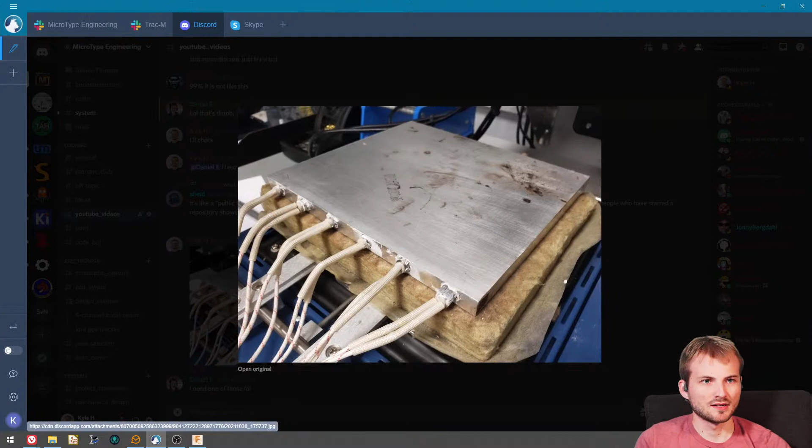But anywho, all right, so for this stream, I just posted this in Discord. So you're not showing your person anyway. I know, it's kind of funny, it's only at the start, but whatever. So this is the hot plate that I currently use for pretty much all of our prototypes.

It's like the greatest thing ever. And it's simply just an aluminum extrusion that has 2, 4, 6 high power cartridge heaters that go into the aluminum plate. And these, I have tried everything in my power to find where I bought them from—it was like 3 years ago—to get the exact specs on it, but I can't find it. I'm pretty sure they're like 2 amps, 2.5 amps each at 115 volts AC. Obviously I can measure it, but they're all connected in parallel, so I'd have to disconnect that.

But basically, yeah, just super high power cartridge heaters here. And right now this all just goes to a single plug that I plug into an outlet. And then there is obviously the mineral wool that keeps it from burning up whatever's below it, which obviously mineral wool isn't the greatest thing to be breathing in. So it's kind of really janky right now. And I don't have a way to control the temperature.

So basically it's on a switched outlet. Depending on what type of solder I'm using, I will typically put the board on and then turn it on at the switched outlet. And then once it's going, it will take like 3 or 4 minutes to reflow. Or if it's higher temp solder or a denser board, I'll sometimes start it heating, then put the PCB on it, but it just depends.

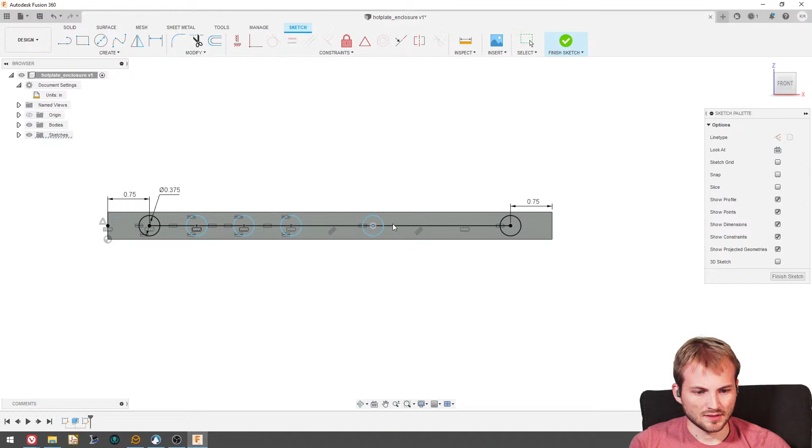Okay, so I need to make all of these equal. Oh boy, now I've done it. Okay, I believe that's good, and now it should just be needing to constrain these. Yes, okay.

Came running back to mechanical design. I know, right? And by watching me clumsily go through this, you wouldn't really even expect that, but it is what it is. Okay, there you go.

So let me see what this actually is. How accurate? 1.3. Okay, so my measurements were pretty solid.

Yeah, through school I got certified in SolidWorks, and that's what I had been using. But once I was out of school, I could no longer get education pricing and would rather not use that for work. So Fusion it is, which honestly, for a lot of things, it's honestly better that way.

Okay, so basically, here is our hot plate, and let me make this its own component, and then we'll rename it hot plate.

And for now, Fusion is hands down my favorite, but have you used SolidWorks? Until you've used that, I mean, that's one of the gold standards, at least for non-simulation heavy work. It's a pretty good standard, but okay, so I grounded this.

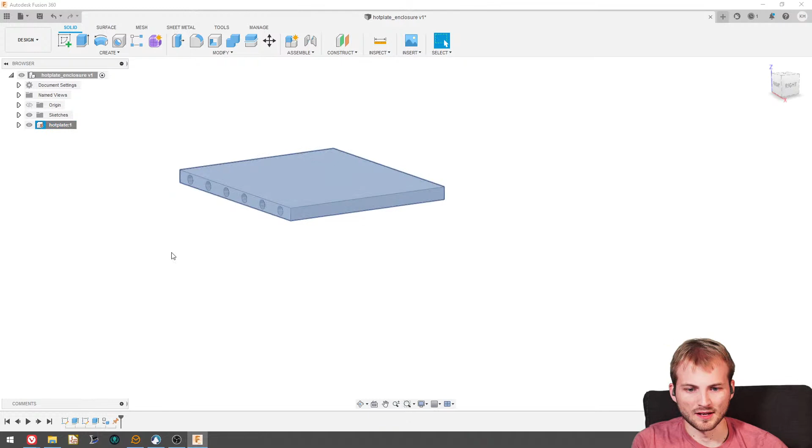So the plan is kind of twofold. One is we need to get it off of that mineral wool, so we need a way to elevate it. And to Sion's point, I don't think we're ever going to be able to cool this down fast enough to where you can keep the board on it. While that would be really nice, I don't think it's possible. It would be really nice to use a fan and cool this off faster. But also, there's a lot of thermal mass still in here, which makes it heat up slower.

So one thing I'm planning on doing, and this isn't going to be a focus of this stream, but I think I'm going to get sections like this milled off here to make it much, much less thermally massive. So it'll heat up a lot faster, and then it'll also cool down faster, especially with a fan. So that's something in the future.

I've tried using it, but the learning curve was a bit rough. Oh, for sure, the learning curve is there, but it was honestly painful going to Fusion because SolidWorks is so part based, where you make all your parts separate and then add them into an assembly. Here you do it together, which I think is much faster for stuff like this that's super simple. But for bigger assemblies, this becomes a nightmare, which is why SolidWorks is still used a lot more in industry.

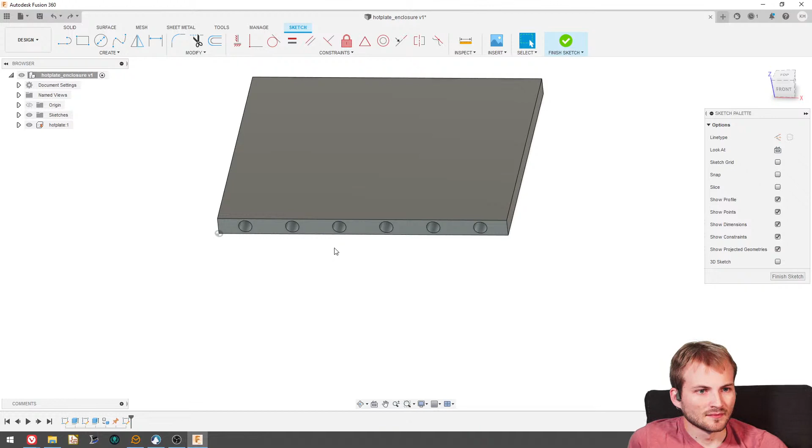But yeah, either or. Electrically triggered liquid nitrogen injection? Oh trust me, I've thought of water. I've thought of attaching some water cooled brackets here or a manifold so you could cool it with a computer water cooling system. But other than having to worry about the water boiling off, any metal added in here is going to make it more thermally massive. So we could do holes in here and pump fluid in, but I don't think we're still going to be able to cool it down quick enough. And it's so inefficient having to heat it up fully each time for every board. So I don't think that's going to work.

Why not just control it with an SSR like a heated print bed? Bruce, you're jumping the gun, I'm not there yet. Could it do PID? Yes.

So to summarize, two things I want to accomplish. One is build a stand for this so it's no longer sitting on mineral wool. And the second is to design the electronics for this so we can use whatever microcontroller. Once that's set up, it really isn't going to be able to follow a reflow profile because it's going to be full power until it gets to reflow temperature. But at least it might be able to hold it at that temperature. And then when I switch it off, potentially having fans at the bottom to help cool it off.

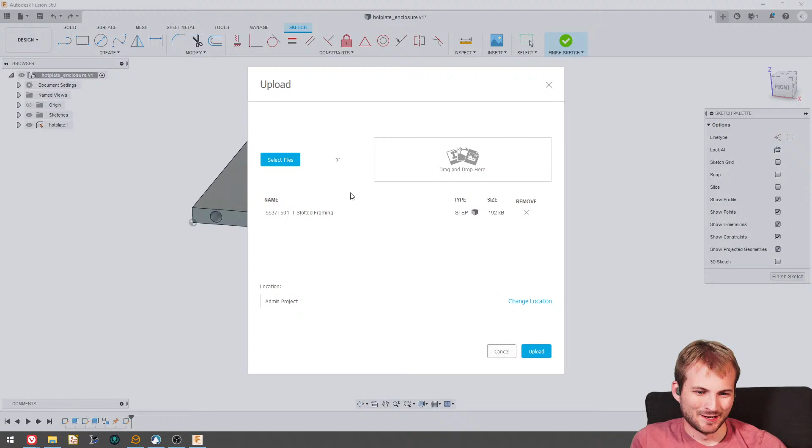So I am going to grab, I guess, just a foot step file. I have a decent idea of how this is going to work - I've been kind of thinking about this. I've wanted to do this now for probably 2 years, it just never happened. That's kind of why I decided to do a stream of this, because it kind of forces me to finally do it. But I still don't have all the electronics side fully sorted.

But yeah, hot plates for prototypes, I think, are by far the best way to do it, with the only exception being if you're doing any double-sided boards - obviously you can't really do it on a hot plate. But short of that, they work.

Come on, why is it not letting me drag it in? I don't know why it's not letting me. I don't understand, I can't show my side panel because I have other projects, but normally you can just drag in the other file - that's just a step. I have no idea what's going on. Let me see if it's because I have two windows open. One second.

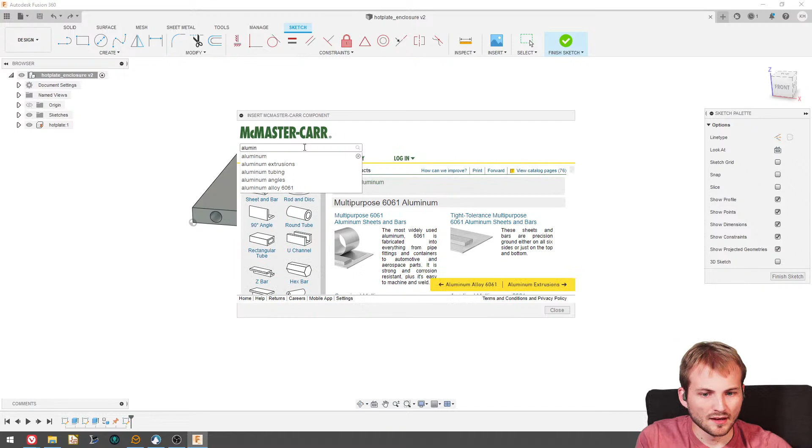Okay, I have no idea why - when I have it imported... oh, really? I can do them directly? That would be amazing, so how do you do it? You go through the insert menu. Where's the insert? Oh, right here. Are you serious? Okay, well that's really cool, I never knew that was a thing. Well, I appreciate it. Or anything SMD with through-hole pins, like some USB parts.

That is so cool that you can do this directly - that was something you could do with SolidWorks, I didn't know you could do it here. That's really cool. Okay, no, not 10 millimeter - 20 millimeters, the smallest standard size still. So 1 foot - so I'm assuming I still do 3D step, I guess? Oh, that is so cool, I appreciate that, that's really helpful.

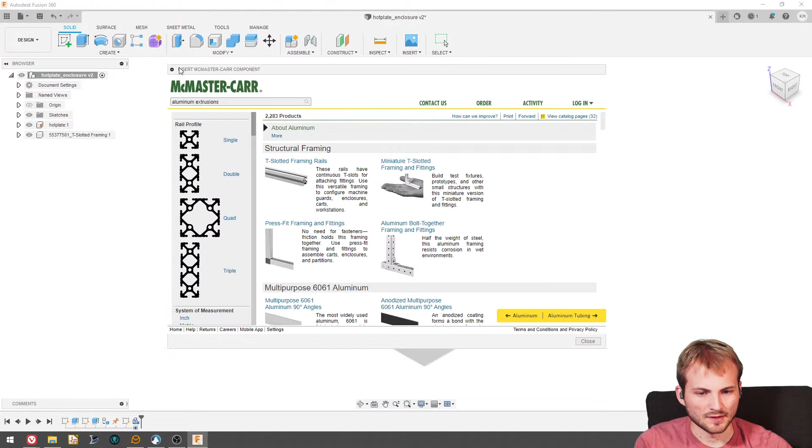Except... all right sweet, okay cool. So what I am thinking of doing, I guess I'll show you what I'm also going to be doing. Oh, that's I guess one annoying thing - you have to go back and find it each time, whereas if you're downloading them separately you get to keep it open on your monitor. But I guess beggars can't be choosers.

Okay, so basically using these brackets - I'll obviously properly mate these later, but just showing you the gist of it - these are going to hold up this hot plate. These are threaded, which is kind of annoying, so I'll just end up drilling these out, because if you tap both sides it's going to pull itself apart. So I'll drill these out and then tap a hole in the extrusion - this will be held up by the screws here.

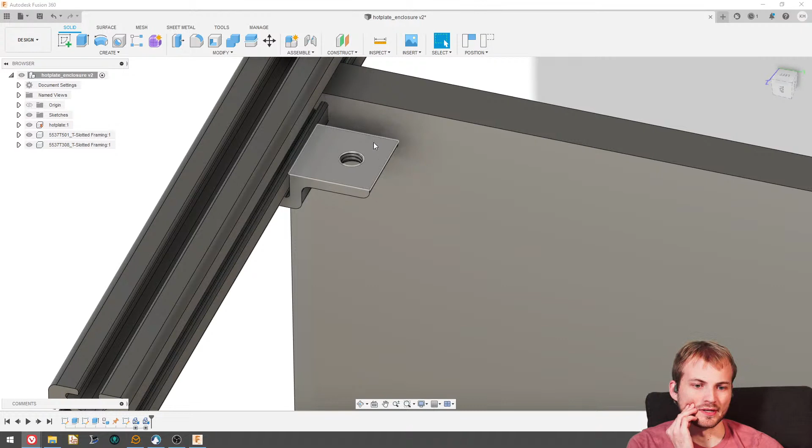And I'm debating what to do with the washers, because since this will be tapped it'll already have a thermal connection to it, which I don't want. But I guess if I don't really have a choice and it has to be thermally connected somehow, I could still put a ceramic washer, which will help insulate it, because I don't want a lot of heat getting from the hot plate to here - it would make it take longer to heat up.

But yeah, that's essentially the plan for making the corners of this - that part I haven't thought of yet. Nylon washers, yeah, you can't use nylon - nylon will melt, but you can use ceramic, which are thermally isolated.

The problem is the screw is going to be tapped on the aluminum, so there's always going to be a thermal connection at some point, and PEEK won't be nearly hot enough or won't withstand heat, so I'll have to use some sort of metal. You can mix metal, stainless. Yeah, that'll help some. Either way, it's going to transfer some heat, but I'm not too bothered. I'm only going to have to use 3 screws, so it really shouldn't be a big deal either way.

So for the brackets, for the corners, there's usually 2 different options. Normally these work pretty well. I think they have a three corner one. I guess it's just 4. Oh yeah, this is 3. So yeah, just using these in the 4 corners, that probably will work.

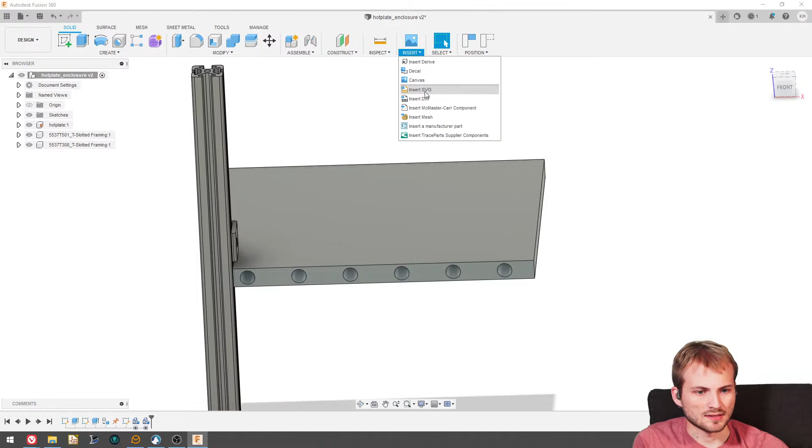Oh, and I bet I can do this. Just copy the part number, and now I can insert this much better, or quicker rather. Oh yeah, that's awesome. Man, that's like a game changer. That's such a big deal. That makes it so much nicer.

Okay, so the only other thing that's kind of a pain is on the end that the heater wire sticks out, it has a radius or distance of like 1.5 inches before it can start bending down. So we're going to have to extend the length on that side somehow, or to some extent. That's going to be a little bit annoying. I'm just trying to figure out now which way makes the most sense to start.

Probably with the extrusion, I think. Let's see.

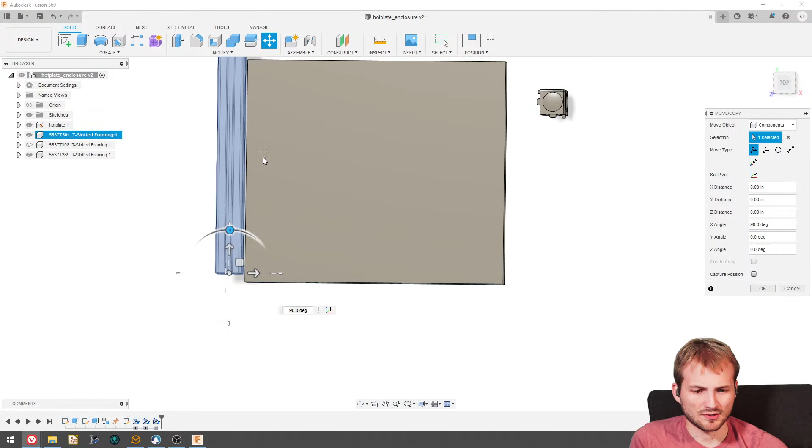Glass rods, used kind of like those wooden plugs IKEA's such a fan of. I like that, I like that. And what we can even do further to make sure - not that it's going to be jostled around, but to make sure the metal plate can't lift out of it - we could probably use some non-thermally conductive goop that's high temperature enough to withstand it. I really, really like that idea. Yeah, I think that probably is the game plan.

So basically what I'm thinking is, like I said, we're going to have this side sticking out by like 1.5 inches, and then the wires are going to come out and drape down, where all other 3 sides will be flush, or flush-ish. So I'm thinking just do it kind of arbitrary for now. And let's mate this at least on one side to know what the distance should be.

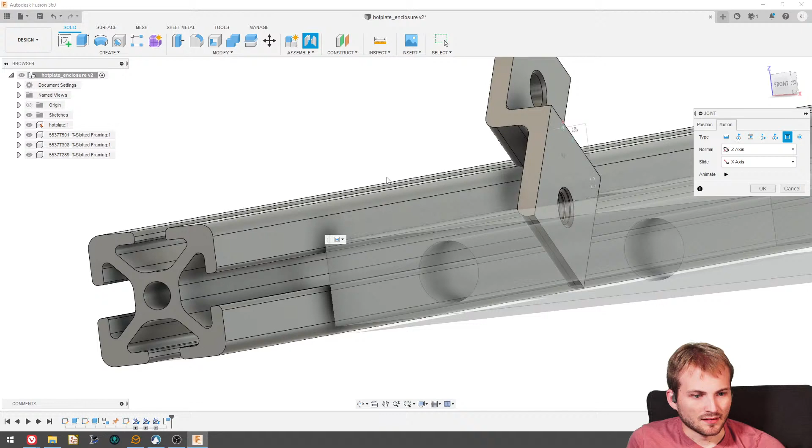You need a cheat sheet list for the partners. Yeah, right. It is funny all the random stuff that I learn from doing these live streams. It's insane, because it doesn't matter how much you know about a topic, you're always going to be able to learn things from people. That's one of the things about doing live streams and the Discord and everything that I was kind of surprised about, which is really cool. It's kind of like back in college - when you're around that many people at all times, you're destined to learn a lot of stuff just randomly.

Okay, so this isn't like the permanent orientation for the joint. I just want to see where it needs to align. Now doing...

SolidWorks calls it mates, here they call it joints. SolidWorks does a much, much better job. Some of the times it just doesn't count that it was clicked, and you have to redo it, or double click OK, even though you don't do anything different. Or you have to click flip twice, even though it's back to exactly how it was. That type of stuff's really annoying.

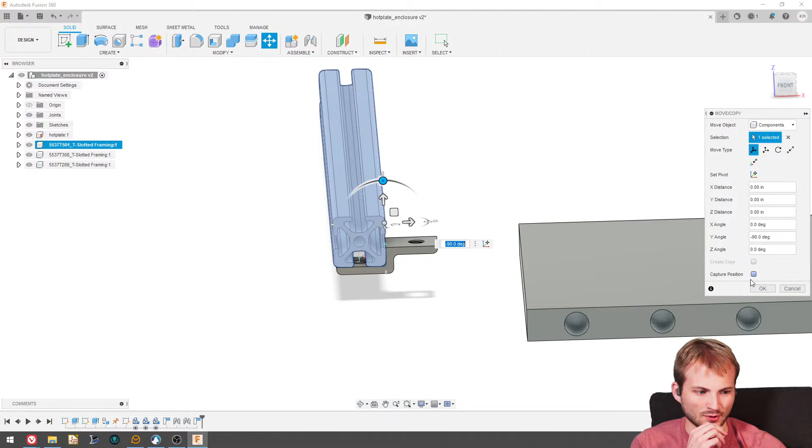So I guess just trying to think of which way makes sense here. Maybe what we'll do is actually rotate this and capture it here. Because I know it's under 15 amps, because this was before I actually moved to the office here, so it had to work at my home electric, and that was on a 15 amp breaker. So it needed to fit there.

Oh, I know what I'm going to do. Let's do the holes first, so then we can reference everything to that. Yeah, I like that. Sure.

Okay, so I believe these were a 1/4 inch, so let's just do a 1/4 inch hole here.

The way it forces you to do projections is also something that's really different with SolidWorks. I actually don't mind how it does it here. SolidWorks is kind of globally done, which gets you in trouble sometimes, but I just always forget and have to do it after the fact.

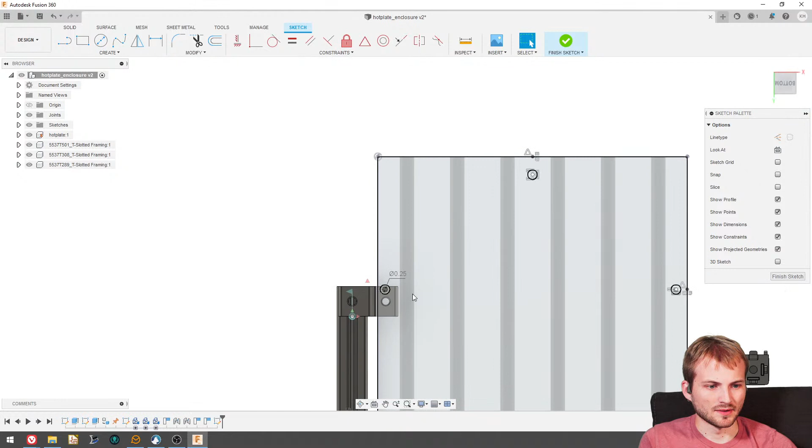Okay, so distance away, does that really matter? I don't really think so. As long as we're not too close to going into the actual area, I don't think it matters too much. So we'll base it off of these. Let's make all these equal.

Maybe 0.3 inches, we can do that for now. And I guess I'll just do these all the way through. Tapping a blind hole in aluminum, or really any metal, can be kind of annoying, so I might end up just drilling a through hole. We'll see.

Okay, so now that's what we can base all of the other joints to, which will make it a lot easier.

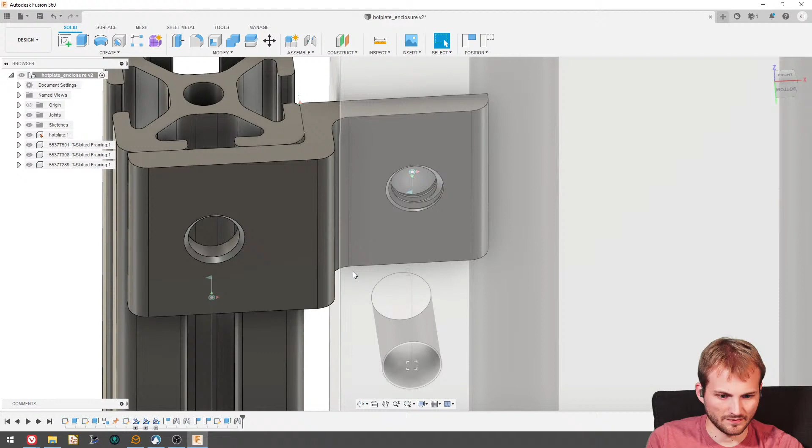And sometimes it lets you do a full mate, but that time it fixed it distance wise. That type of stuff I have not figured out fully with Fusion yet.

Which, I mean, I'm sure there's a way to accommodate that, but for some reason AliExpress decided I'm now expecting this in Hebrew. That's funny.

Just have to use some sort of... oh yeah, if I'm doing that, then they don't even have to be tapped, so that's another reason that makes it easier.

Yeah, this is the type of stuff that's annoying with Fusion, because it says there was already a concentric mate, but it let it move, which means there clearly wasn't a concentric mate.

And I'm not going for perfect accuracy here with this, because it's obviously going to be mainly cut by hand, so as long as the dimensions are roughly accurate, that's all I'm really going for.

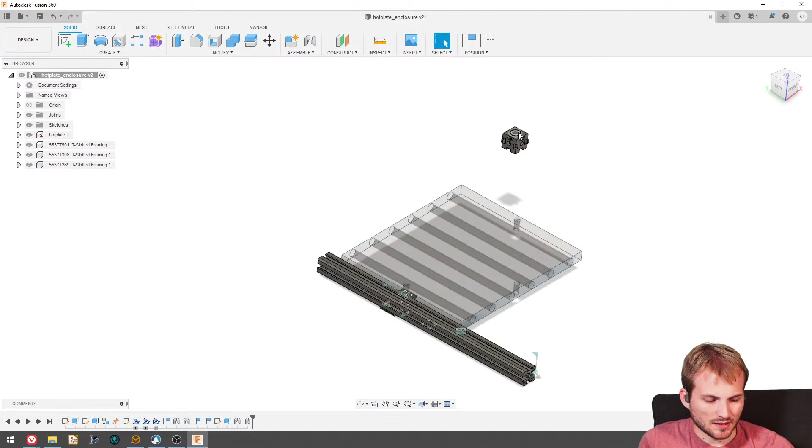Okay, so now which way do we want? I guess we can mate this now here and just build it out one side at a time.

So let's move this, and then it does weird stuff like that, like it thinks that I wanted to rotate it out this way for some weird reason. I'm just trying to get the orientation right, like that.

My 3D printer uses a ball mount, but that needed to mechanically separate and allow for thermal expansion. Yeah, the problem is this is going to be really hot, like 300 C, and not a lot of thermally isolated components will go that hot, which makes it a little bit rougher, but we'll see.

Again, I'm not overly concerned, but the more we can do, obviously the better.

So what I do a lot of times is I get the first mate like that, and then we'll just do an as-built joint, which clearly isn't the best way, but it works.

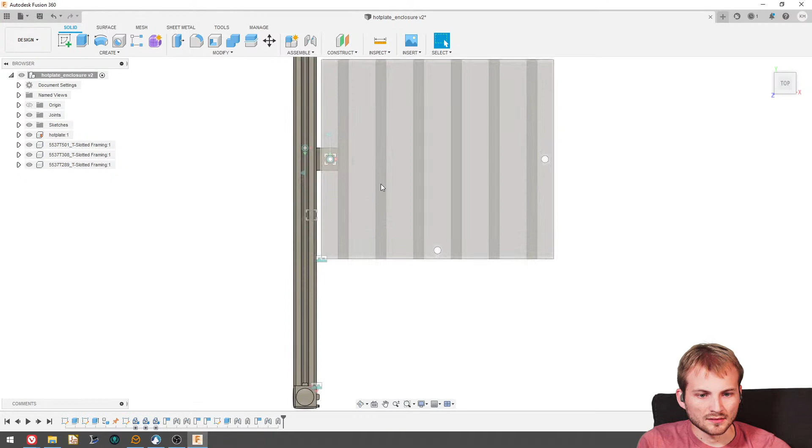Okay, so now let's copy this, and the one thing I really don't like is how if you paste it, it automatically links the two together, so you have to do paste new, or both of their cuts are tied together, which has screwed me over many, many times.

I understand that sometimes it decides French. Yeah, I've never had that happen before. I guess they value the whole American language. That was a joke if no one caught it.

Okay, mate these two, yes. Okay, now we need another one of these.

Now this one, since I'm not going to be cutting, I can just do paste, I don't have to do paste new, which, I mean, realistically doesn't matter.

So now I'm going to have to cut this, which... how am I going to figure out what's that neat feature where the part floats into place? This calls it a joint, but SolidWorks and most tools will call it mating.

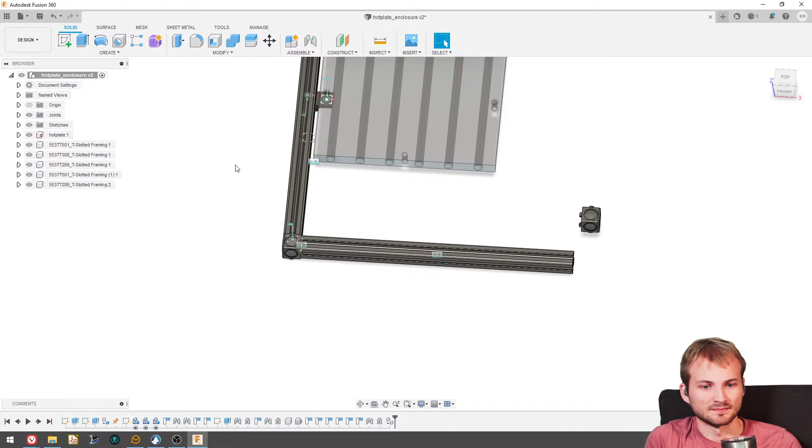Fusion, I really don't like the way they do it. It works good enough, but it's not very smart. Like SolidWorks lets you do two mates at once or even three, so you can fix it all at once, where here you have to do it separately.

So now how best do I cut down this? Oh, I guess I can do this first, so I don't have to worry about that right now. Whoops.

It calculates the way it should fit together. So basically you select the two features you want to mate, and you can select different motions like rigid, revolute, slider, cylindrical, pin slot, ball, and then it'll move it. In SolidWorks, you can completely constrain it in one go.

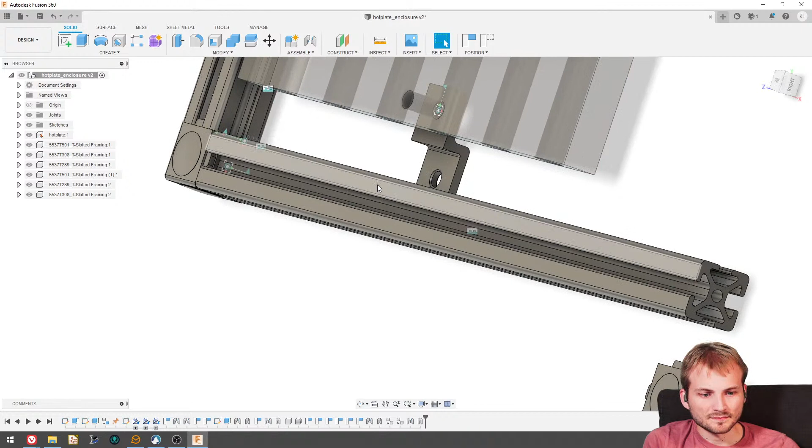Here, I don't know why, it's kind of not very intuitive. You do an as-built joint, which just fixes it right into place and overrides the previous one, which I guess isn't a big deal, but it's kind of annoying. So now here we'll do a planar joint on this side, so now this should be fully fixed on this side.

Okay, so now to cut this it'll be much easier. Let's put the sketch, and now we just need to get the distance here. Let's project here, and this edge, and that edge. And now if we do a line here, we can make it collinear.

It's not over-constrained there, pal. It's stuff like this that Fusion does. Okay, and then now with that distance, all we have to do is draw our squares or rectangles there.

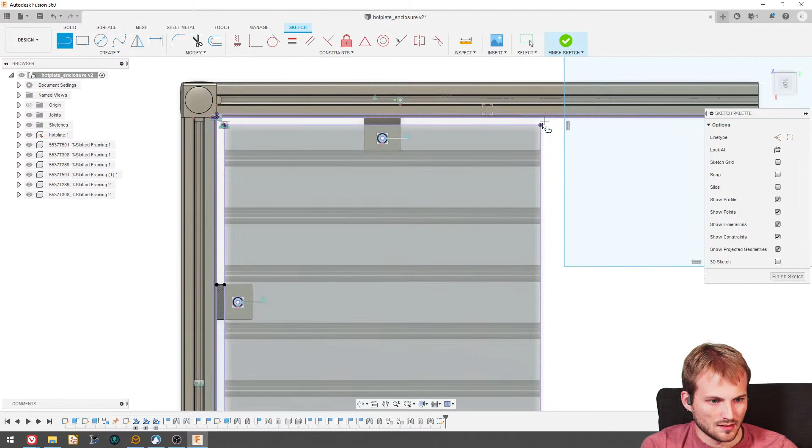And make a distance here and here. Oh, that is not perpendicular. Really? Oh, it's because it just so happens to be the midpoint, go figure. So now we'll make that equal, and that equal.

You really can't do it because I said extrude all. Really? So like there, it literally couldn't calculate the distance that it needed to extrude, which really shouldn't be a thing, but it's a whole heck of a lot cheaper than SolidWorks, so it's hard to complain too much.

Okay, now let's do one more. Now this one, let's take it from here, and that one, I guess. Oh, crap, this one is going to need to extend to give this room.

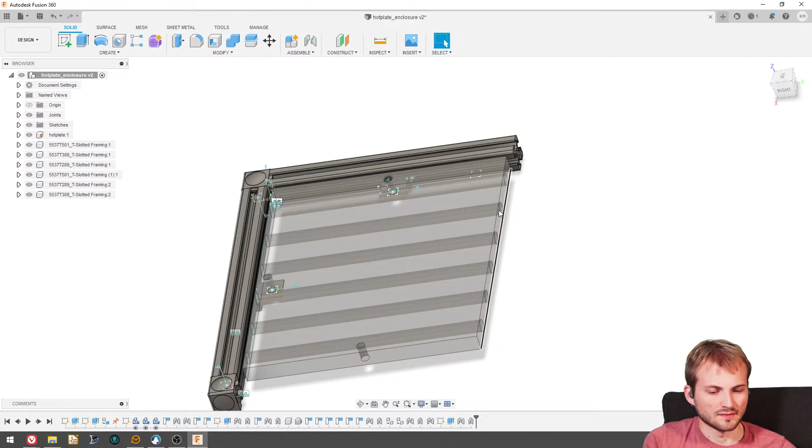So let's get rid of this, completely forgot about that. And now the extrusion's gonna complain. No? Okay, so now this one we will not paste new because we want those to be the same length.

It's funny, not many people must like me doing mechanical stuff, not a very popular stream. I honestly don't care too much because it's forcing me to actually do this project without just getting bored like I normally do or putting it off, so I do not mind.

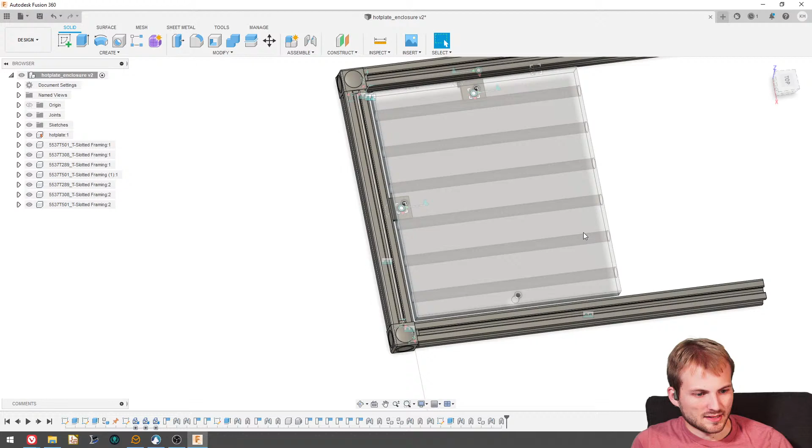Okay, so now it's just doing it for the other side that needs to extend down. So like I said, the wire sticks out here 1.5 inches, so maybe let's cut it like 2 inches and see how that goes. And in theory I only have to cut this side because the other one's referenced from it, so it's going to cut automatically. We'll see if that actually works though.

And apparently it's not going to be able to calculate. Yeah, so it automatically does that. Oh, I don't want to, I made that too big because we have to have this nugget, so let's see how long this is. 0.78, so let's do like 1.25 inches instead of 2 inches here.

Now copy, paste that again. Oh.

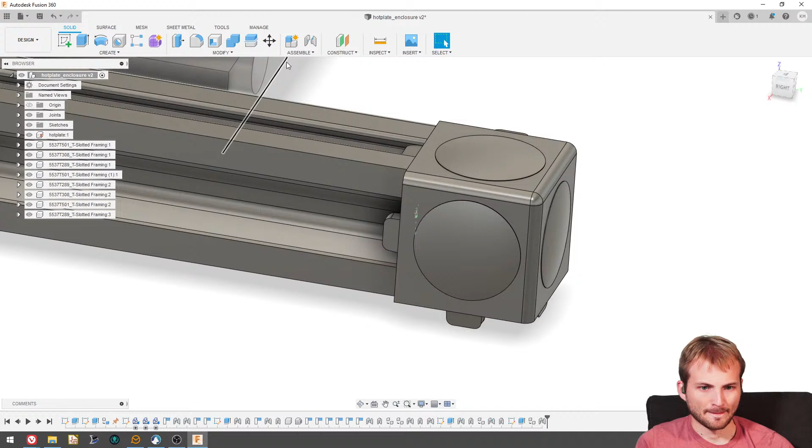And I hate how Fusion just freezes like that after you do something sometimes, which I guess is because it's somewhat cloud-based, I honestly don't really know. All right, and oh, I guess we can add this too.

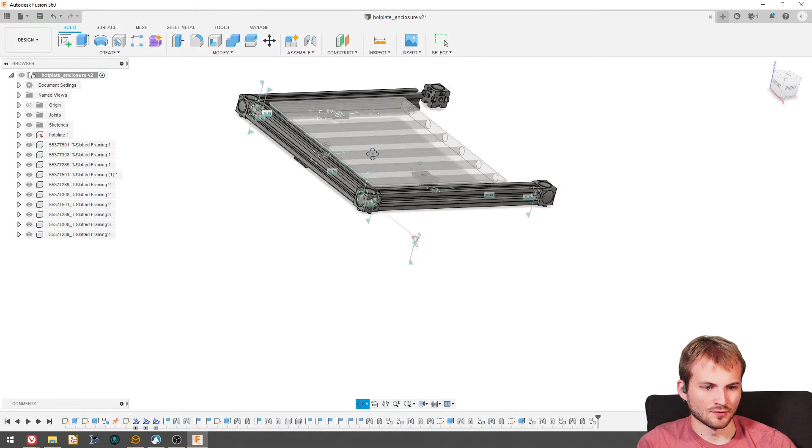Actually never done any mechanical stuff. Gotcha, well how quick you've picked up on the whole electronic side, you might as well, though I guess it really depends on if you have much of a need. What's funny is that's what my degree is, except I hired somebody to do all the mechanical work. I'll do simple stuff, like modeling up simple enclosures or modeling a PCB outline, but anything more complex, especially if it's injection molding or sheet metal stuff, I don't do that. It's something, especially the manufacturing side, that's so involved and it comes with a lot of experience. 3D printing stuff's obviously pretty easy because you're just printing that part directly, but mold design, that's an art in and of itself. I only did some very simple stuff for 3D printing, need to learn more, but there's always something, yes for sure.

Okay. Oh, that did not work. I think we have a problem there. Um...

I'm just looking at SolidWorks pricing, not inexpensive. Honestly, if you're not trying to get into doing it industry wise, there's no way to justify it. Ray, who does our mechanical work, is using SolidWorks instead of Fusion.

Okay. Why did you not like stuff like that? Oh. Why will it result in conflict?

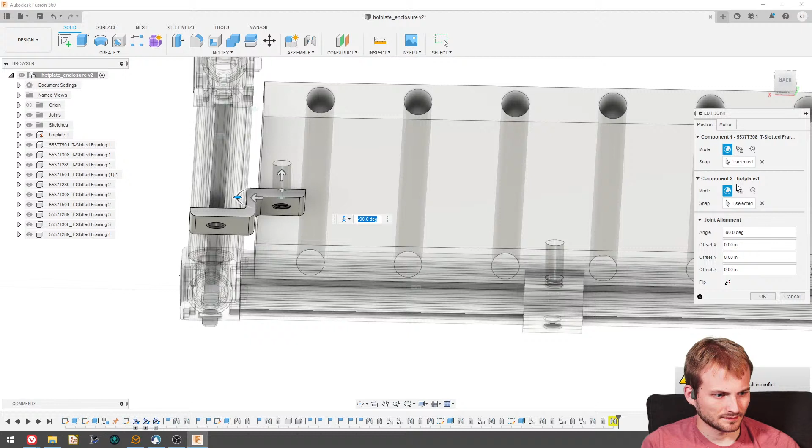But yeah, for simple stuff, especially if you're just learning. Oh, it's because I still have the as-built joint. Oh, get out of here. But which one is it? I think it's that one. No, then I'm just gonna get rid of this and start over.

Oh yeah, mold is something else entirely. I can totally see that. Yes, for sure, that's something I'll never get into again. I know the basics just from school, but it's like anything, until you actually are doing it for real projects you don't really ever learn it, at least not to the extent you need it from school alone.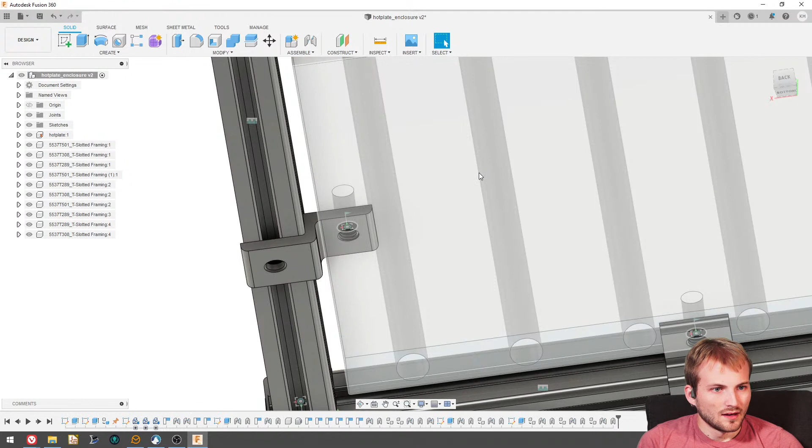Okay, now we're good. So do the as-built joint, these two, yes. There are 12-month free licenses for some small businesses, startup ones, but they don't seem to care about the low end.

I've mostly seen Fusion professionally. I've never seen Fusion professionally, I guess technically I'm using it professionally since I do it for jobs at work, but never anything involved. SolidWorks is still king in the low end market. For any sort of simulation you're going to have to use ANSYS, or once you get higher up, Creo, Rhino, stuff like that. But it depends.

They have a startup license, but it's still really expensive compared to Fusion, which is why it was kind of funny when people were all up in arms about Fusion increasing their price to like, I think, $600 a year. I don't know how people can get that upset, obviously at some point they were going to have to monetize it. That is so reasonable in this industry, so I'll happily pay that because there's no alternative that's even remotely there.

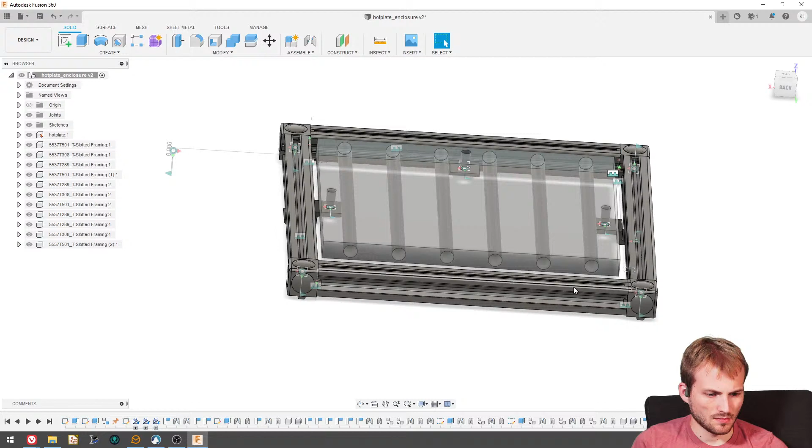Oh, why did you complain? Um, why did you complain?

I have no idea. So if I do this one, then I can just paste it straight up. So let's just do that. Keep Fusion from getting mad at me.

Okay, and then 100% opacity. So then, like I said, here are the wires, which right there is the bending point, which is about an inch and a half. So that's where the wires are essentially.

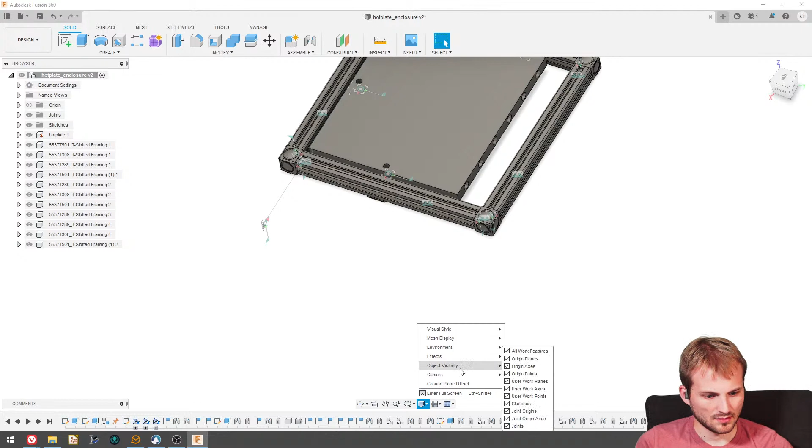How do I get... there's normally a side menu here to get rid of all the joints. Okay, maybe we're not going to be able to get that. I don't know. Oh, here we go, joints, there you go. So basically the wire is going to come out here and then dip straight down and then go into the electronics area. So I think that works out pretty well.

Let me see exactly how wide this is. 1.25 inches, so I guess we do need to make that a little bit longer.

So let's make this... oh yeah, that nugget's on there, so it is supposed to be what it needs to be. So let's do 1.75, there we go. Okay, so yeah, that's looking super nice, I'm happy with that.

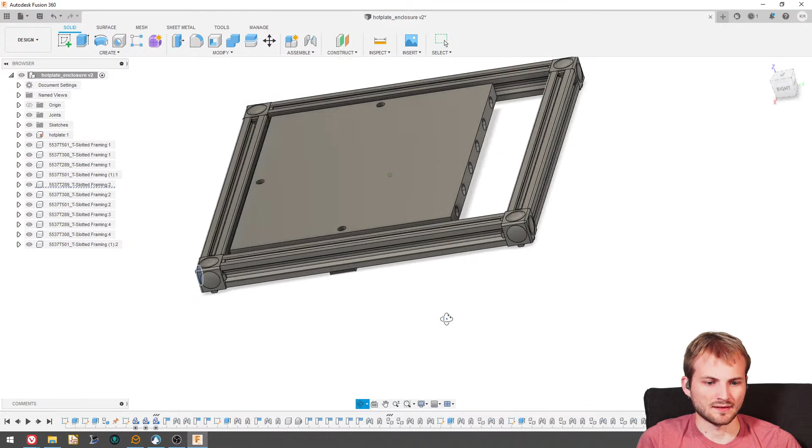And then these are just little caps, so you can actually have the bare screw in there. And I'm planning on putting an acrylic panel on the outside of all of this that I can mount the switches to, that I can mount all the other stuff to. So I think that'll work out pretty well.

Hey Johnny, just in time for the fun, I guess.

Or do your people use Autodesk Inventor? Yeah, for 2D, AutoCAD is still the king in my experience.

So from here, now we just have the vertical pieces going down. Like I said, we'll have an acrylic panel on all 4 sides. We'll mount the power cord on the back, and then the front instrument panel, control panel. I honestly haven't really thought of what all that's going to be yet. So now, Ahid, let's look for what you were talking about.

Let's look at raw materials. I think it'll have to be a ceramic to be high temperature enough. Let's see, maximum... what is 300C to F? So we need like 600 F or above. So any of these.

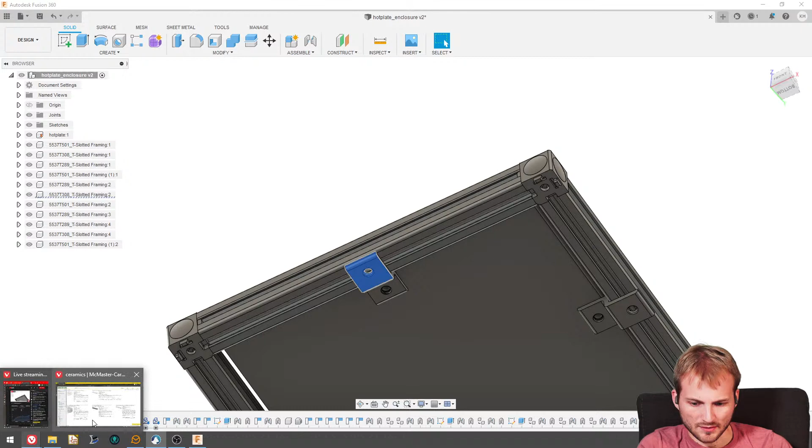These will now no longer be through holes, they'll be blind. So if they're halfway through, that's a 1/4 inch nub. So 1/4 inch, 1/2 inch, so it's 3/4 of an inch total. So where am I going? 3 inches is plenty, so we can go with this.

The only thing is, how do we cut this? Does anyone have any experience cutting alumina silicate ceramic rods? Lava and Wonderstone, I'm assuming.

What about having a second isolated surface with an air gap to slide the boards onto? Second isolated, yeah. So the way that I did this with joints now, it's going to make this kind of a pain to lift this up. But basically with the washer here, it's going to be above this, so we'll be able to slide them on and off like you're saying.

I don't know how much, if anyone's following what Ahid said. The problem is to show it, I have to break all of these joints, which isn't going to be easy. But I kind of have to. So first, let's do this. Let's extrude.

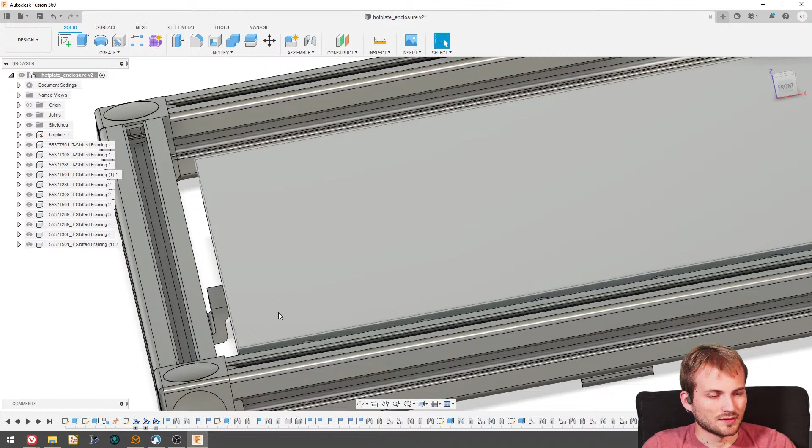Okay, so now no longer these are through holes, now they just go half the distance down. Alumina can be machined with bonded diamond cooling, with tooling - I've sawn, drilled, and milled with no problems. Okay, so that's what I was going to say. As long as I use a carbide bit, it should be fine, which is what I was assuming. And it's not like these have to be accurate at all.

So let's figure out now, how do I undo these joints without it being an absolute nightmare?

So this is where the stuff I always would have a tough time doing mechanical design, like making changes parametrically, because when I delete those joints, it's gonna move everything around. You undo the joints all at once by pressing Control Alt Delete. Yeah, right.

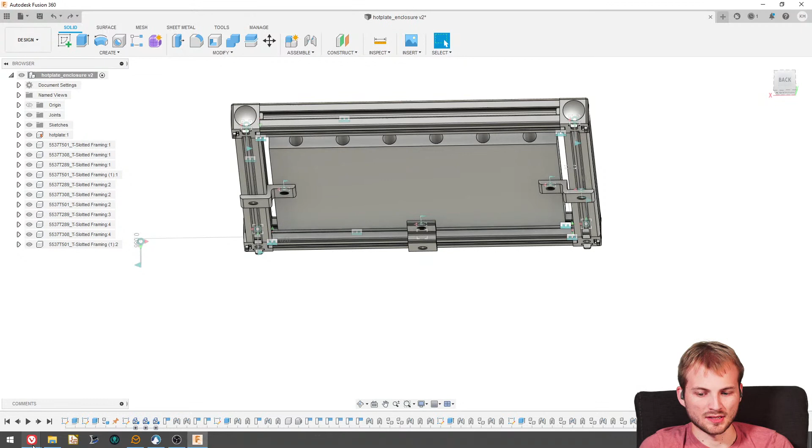Because what I want to do is I want to lift this up with a washer and then use the ceramic rod so I can show what Ahid thought of, and I think will work amazing. But I honestly, short of recreating this without basing it on these joints, I don't know of a really good way to do that, but it's probably not worth it. So let me just do this, let me just show you what the idea is.

So basically, let's pretend that this is the hot plate. No, let me keep doing the sketch. So this is 0.25 inches. Whoa. So this is our hole. We have 3 of these, I'll just put one here. And, oh, it's going to be a through hole. Whoops.

Nice going. And it didn't join.

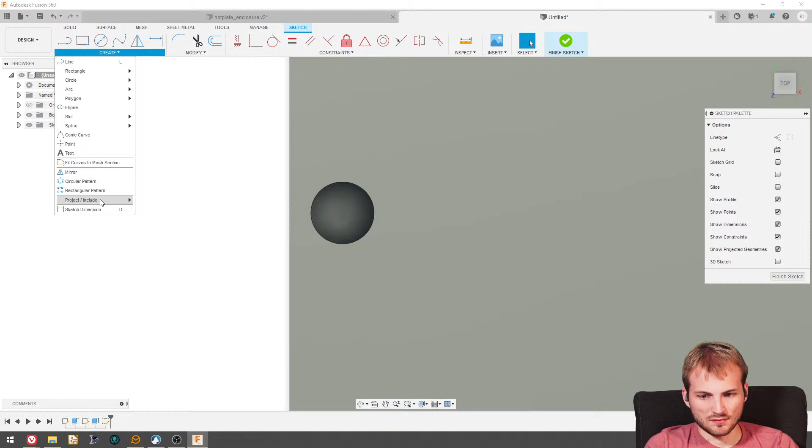Okay, so this is what's on the hot plate. Basically what I think we'll do is take one of these alumina silicate ceramic rods, which are high temperature resistant, so not much heat will be transferred through this. We'll jam that rod in here, and we'll probably need some sort of high temperature, low thermal conductivity adhesive to make sure it stays. That will be on all three corners. Then we'll get a 1/4 inch high temperature washer that sits right here.

So I guess I can draw this too. We'll have a high temp washer that chills like this. Don't join that just to make it visually apart. New body. So then there'll be a washer here, and that will slot into all of these. So basically, this will be fully thermally isolated from the aluminum extrusion, and it'll still be held in there pretty good. I mean, yeah, it'll be completely thermally isolated. I was going to say this can be touching the metal, but that's fine.

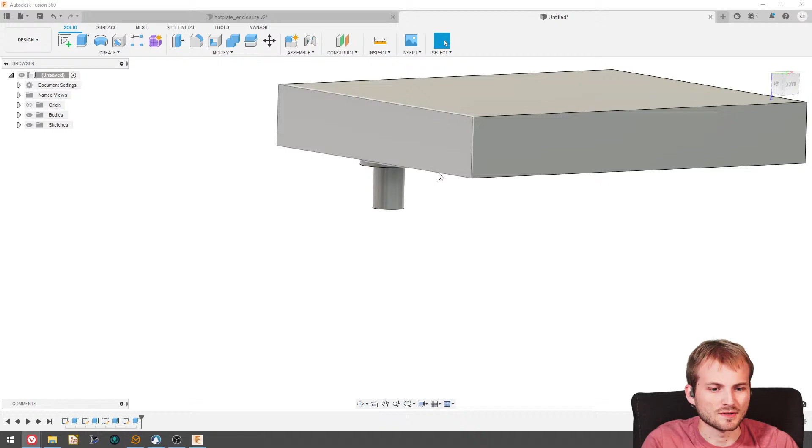And just to clarify, Ahid, this is basically what you were talking about, right? I mean, even if it's not, this should work perfect. So it got me here, but I'm pretty sure this is what you were talking about. We'll just pretend that is set up here, and this is lifted up by a millimeter or two. So then what station 240 said is true — we'll be able to slide onto here without too big of an issue, slide on and off, because there's a gap here which should help.

So now I guess, and I don't know how tall this is actually going to be. I don't think it really matters. But I guess let's just do an arbitrary slot. Yeah, that was the idea. Sweet. Yeah, really, really good idea. That is not what I was thinking of.

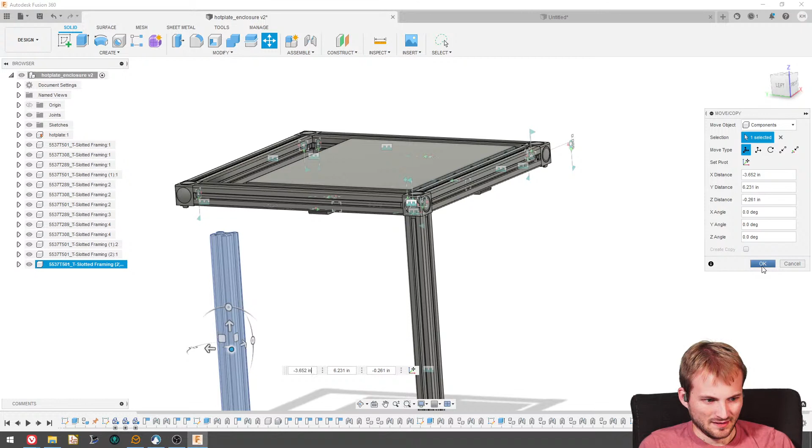Yeah, it's always kind of funny with stuff like this, and obviously a lot of people make it work, but people who are just doing prototypes with a board here or there, they do the full toaster oven thing. And it's like, sure, especially if you're doing a lot of boards, I can see that being better than this because you can do double-sided boards and higher throughput potentially. But for one-offs, man, honestly, we do a lot of prototypes. It depends on the month, but we're spinning probably 4 to 6 different designs a month. And unless it's a double-sided board or a really big board, we're never firing up our main ovens for them, just because it's a waste of energy or electricity unless we're already running it.

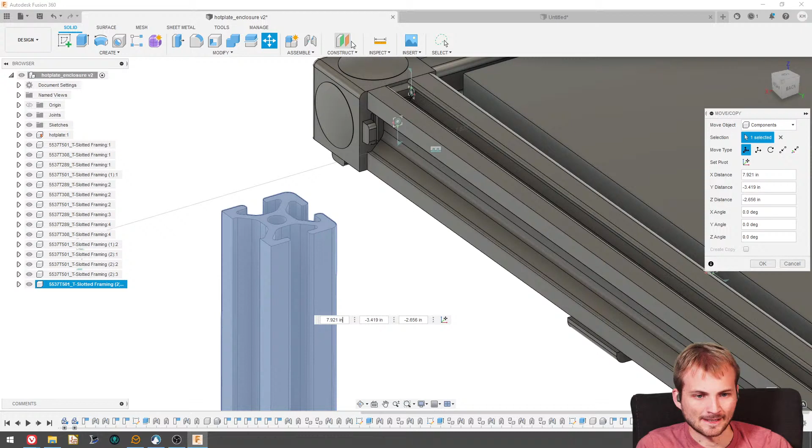So what I'll do a lot of times, and what I'm thinking of doing with the PID loop here, is I'll start it at like 100 or 120 degrees, put the board on, wait about 20 seconds, then start cranking it. I think that will probably give a pretty decent profile, because right now, I mean, it's certainly not great, but I've never had an issue. The key is as long as you're using paste that doesn't mind an extended soak time, you're never going to have tombstoning issues or anything. So it works out really well.

Okay, so obviously the length here we can change, but there's no real sense of doing that right now. Let me get rid of these again. And then just to show this again, so my plan is to use... oh, it doesn't let you drag that? Lovely.

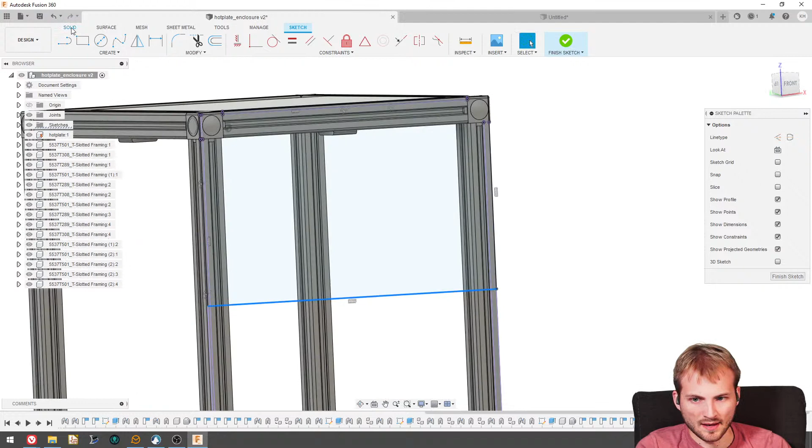So my plan is to have an acrylic sheet that mounts over all of this. And like I said, these caps are just caps. You remove them, so they won't be an issue.

Oh, why did it do all goofy? That's another thing. Whatever, it's close enough. It's just a show.

Fusion will automatically do the main volume, so you don't have to do it separately.

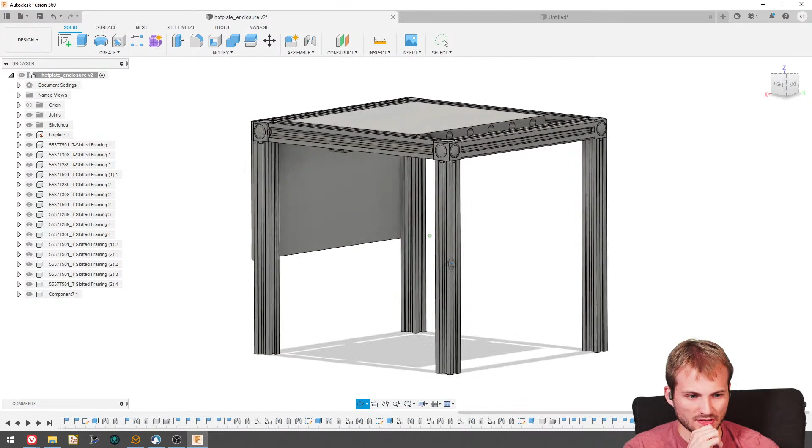I still have no idea what the actual control of this is going to be. I'm thinking just for ease of use, what might make the most sense is simply having an ESP32 that will connect to Wi-Fi, and any of the settings can be adjusted over a web server or just a web page. Then simply just having some on-off or some super simple controls on the front that lets you start it, maybe show a couple profiles. Anyone have any thoughts? Because doing like an actual touch screen and making it all pretty, I think, is kind of a waste. I think it makes way more sense to do it through a web server.

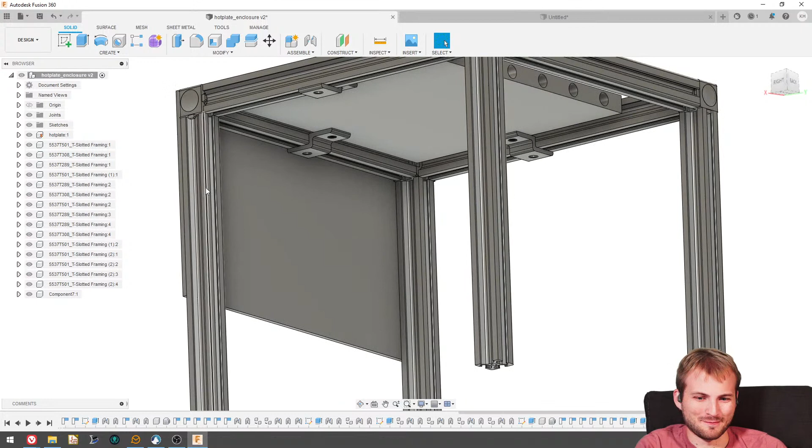Then mounting the PCB, just put a couple mounting holes on it, and we can mount it to any of these legs. I think that works. Yeah, I think that works.

Does any web control... is it nice to just have a manual shut off? Yeah, for sure. I'm thinking have a manual on, and then maybe even a temperature readout or something, and then a manual off. I think that makes sense.

And then does anyone know what the back panels are called that take in the IEC mains plug and have the little power switch? Presumably you can buy those straight on DigiKey. What's the plug called?

It has a... yeah, it's this one. The NEMA 5, which goes to a certain plug, the C13. Yeah, C13.

Okay, so then maybe we look up a C13 switch back panel. Nintendo Switch? How in the world does a Nintendo Switch come up from that?

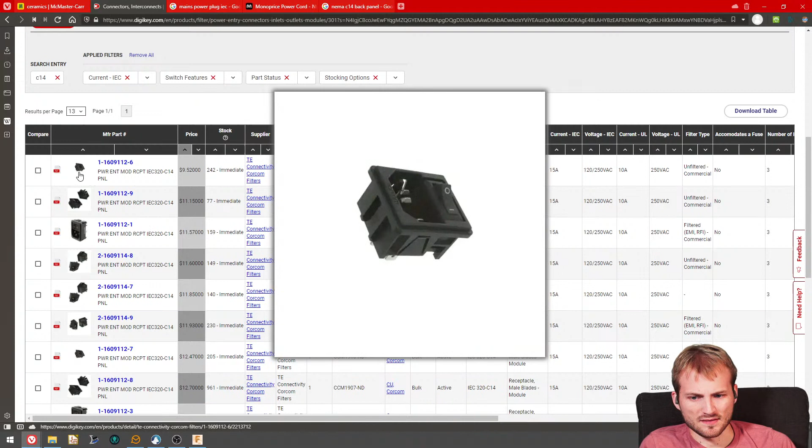Unfiltered, commercial - so what's the actual filter in here? Is it just like differential or... So they say it has a filter, but they do not actually say what it is doing.

Does it have a STEP file? That would be really nice. Sweet.

Pretty sure it lets you do that, no? Alright, well, let me upload that. I could have sworn it lets you do that. Oh yeah, am I going to be able to import this? Because it didn't let me do it at first.

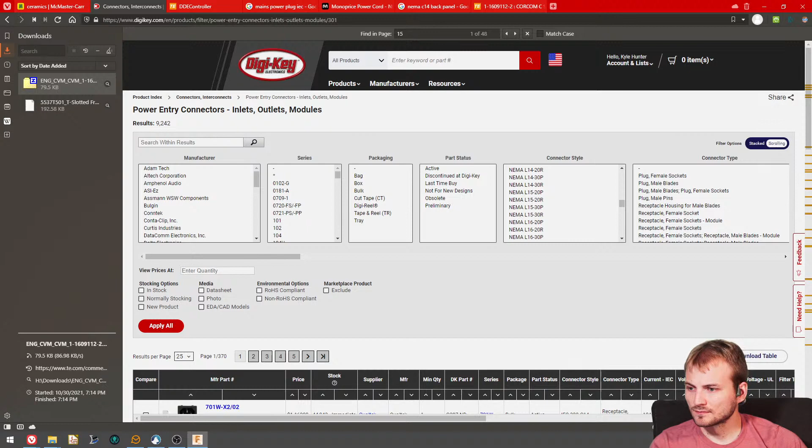Oh, it uploaded. So let's see if I can actually add this stupid thing in. Let me drag it in that time. Perfect. How weird. I don't understand it.

Oh, Ahid, since I'm always telling you in the patrons channel about the music and concerts, I'm listening to reggae now, I don't know if you have that. Like Bob Marley style, I'm listening to Revolution right now. It's super upbeat, kind of chill music. I really like that, I've been on a kick of theirs right now. I just said 'right now' like 4 times. I guess that's my word right now.

1.54 by 1.56 with tolerances, so just do 1.55. I'll drag it over here.

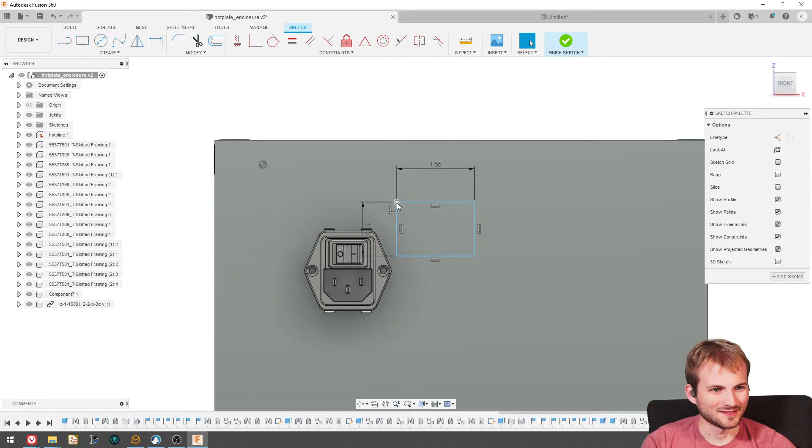I know only the German name, not going to pronounce that. Basically the one you picked with an additional notch at the bottom. Okay, yeah, I don't think I'm going to worry about that whatsoever. No, I think I like it this orientation.

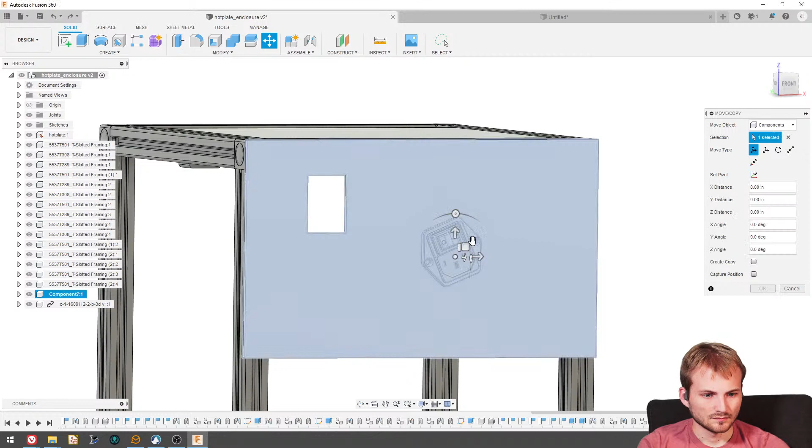Oh, was that not fixed? Whoops. Really? Really? Come on, Fusion.

Set as components. I have no idea, I guess I'll get rid of the previous joint that I did with it.

And now it's not even at a correct angle. Lovely. I don't know why that wasn't working earlier. Weird.

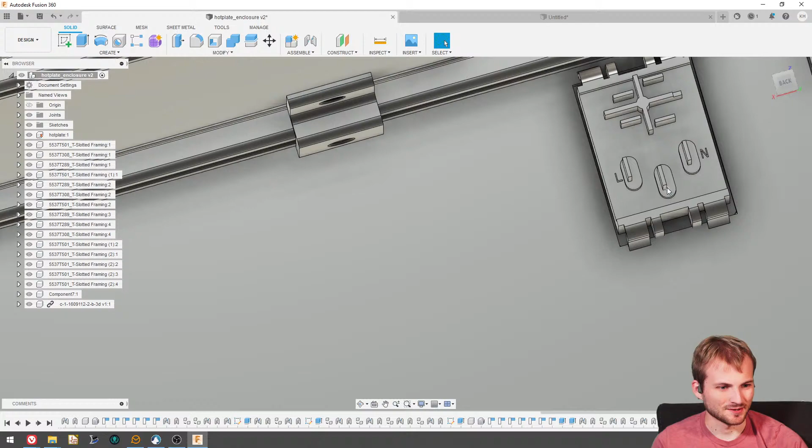Okay, so that's all mated. So we'll have power coming in here. Oh, that's cool, it shows you live, neutral, and then presumably earth.

Probably have earth go straight into here, tie it to the aluminum extrusion, which will be all tied together. And then I guess I'll tap one hole here. So we'll, oh actually, technically we want this to be on the other side.

Alright, well Ahid, you missed me realizing that this is on the complete wrong side. This should be on the back here where the wires come in, because that's where the circuit board's gonna be. But I don't think I'm really gonna care about that right now. I just really want to have the gist of this fleshed out and then can kind of reset it up properly.

But yeah, what do you guys think for fans? Because I want to have like 4 pretty powerful fans shooting straight up here. And we can have the... I guess we have to think of where the airflow is actually going to be exhausting.

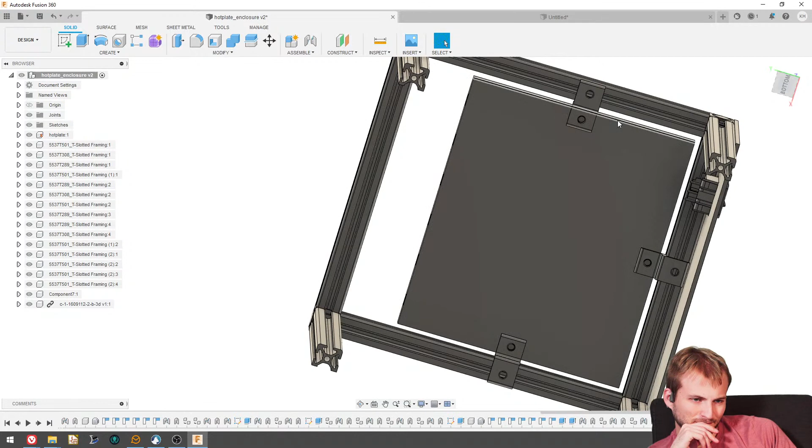See, this is where having heat sinks would be nice, but that kind of defeats the purpose.

Because like I said, eventually, hopefully, I'll mill out some channels here, like this. So that'll kind of act like a little heat sink channel, or at least give more surface area.

So, I have to go, we'll see everyone another time. I need to take my computer apart. Still battling that, huh? Well, I'm glad you're able to come by for a bit.

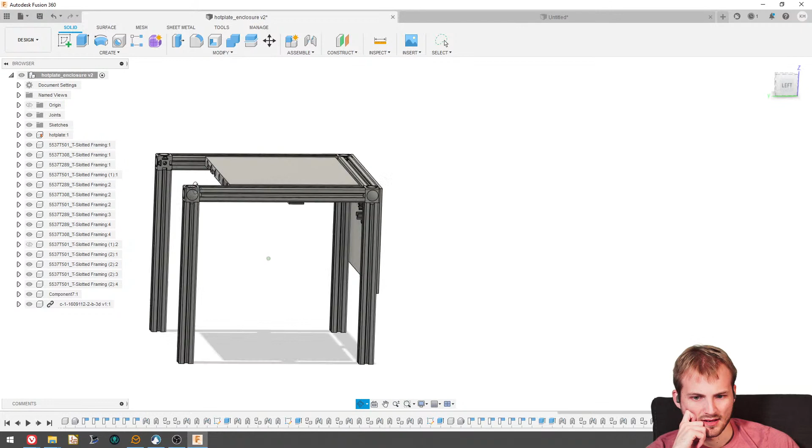So maybe what makes the most sense is mounting the fans here at an angle so they're blowing across here and then it exhausts out this end. I'm thinking that makes sense.

So basically there'll be a bracket here that angles them at a 45-degree angle so the air hits here, and maybe even have a perforated sheet on the back.

Okay. I managed to fix my PC just by starting to take it apart. Gotta love computers, huh? It's like the number one thing. Did you turn it on and off again?

So I guess if we're gonna plan on the fan side, then I guess it does make sense to redo this. So let's get rid of all of these joints.

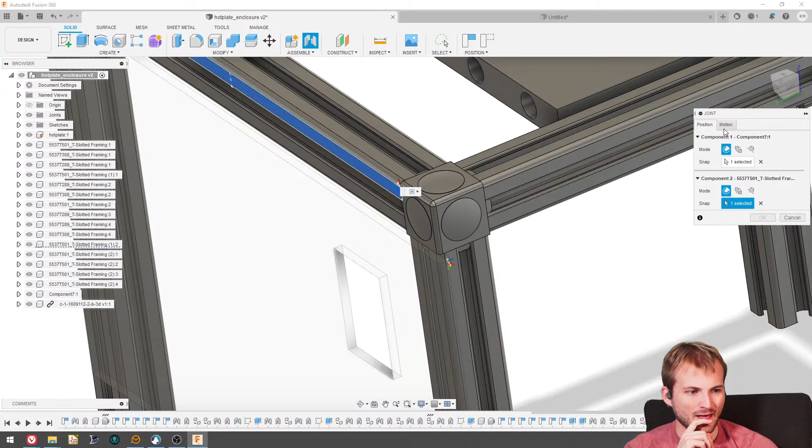Oh, this isn't gonna be near as hard as I thought. What's funny is this is actually gonna end up being kind of a pretty neat control board because it's gonna have to switch the 120 mains, obviously, but then it's also going to have 12 volt for the fans. So the electronic side is going to be pretty decent, and this I really don't care if it's super exact.

Why not enclose the bottom of the hot plate with the exhaust fan so it'll heat up faster, then turn the fans on? That's a much, much better way. So basically make an enclosed box and then it forces the air through and then it would exhaust out the top here. Is that what you're thinking?

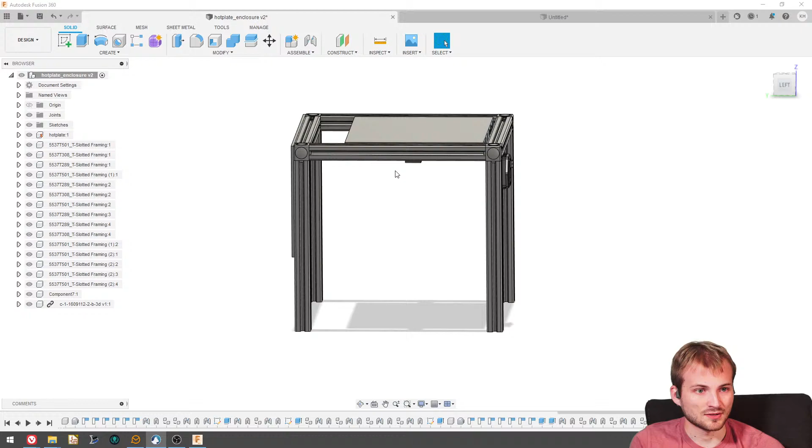I don't think it's gonna heat up any faster just because I had tested this setup with the mineral wool here and with it just on an open surface, and it really didn't affect it whatsoever. Just because there's so much heat going into this hot plate, the heat transfer to anything else is so minimal. I don't think it's gonna affect it too much. But yeah, I really like that idea.

So let's move. Oops. Move this.

Yeah, this ends up turning out pretty cool. This will be a neat, actual formal video, I think. Problem is, for people wanting to do this, unless you know someone or you have a machine shop to do the extrusion for the hot plate, you really can't do it with any DIY stuff because to do an 8-inch long drill, you can't do it by hand or even in a normal drill press. You have to have either an industrial drill press or a mill.

One of my buddies used to work at a machine shop and he did it for me. And then even then you actually have to ream it, so you drill it a little undersized and then use a reamer to make sure it's exact. That's the biggest pain of this - if you don't have that, you really don't have a chance of it working.

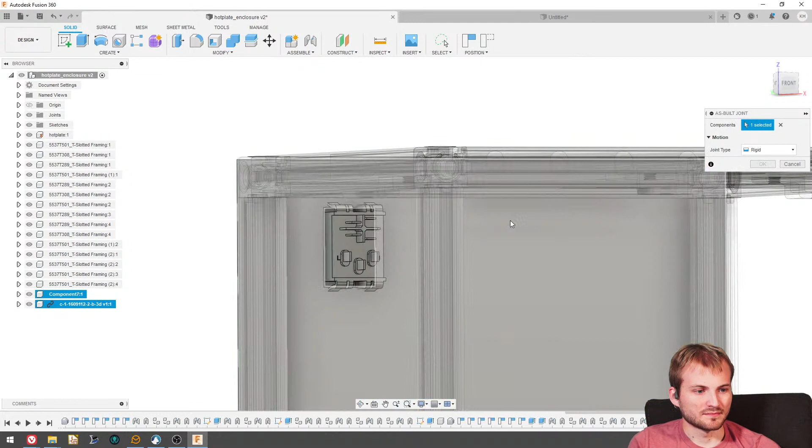I would use an aluminum plate and bolt the cartridges to the bottom. Yeah, but in the data sheets for these, they have to be fully enclosed or else they'll burn up because you have to have really good contact. I'm not saying there's no alternatives, but they're pretty specific - the tolerances on these are really tight. But yeah, I'm sure there's other ways to do it, of course.

Okay, so now this is on the right side. Or buy the inexpensive heaters that come with small plates. Yeah, that's what most people do for sure. But this is obviously the best because you literally have no thermal mass other than the heaters.

So power comes in here. So now, where's my... So on McMaster, let's go back to the extrusions and see how we add that plate on the bottom.

Orbite looks nice if you make it, start selling the extrusion. That's true, actually, that might be a decent approach - let everyone DIY what they want, and then I can at least sell the hot plate side. Yeah, that might make sense.

Okay, none of those. Okay, what am I even looking for? It's how do we...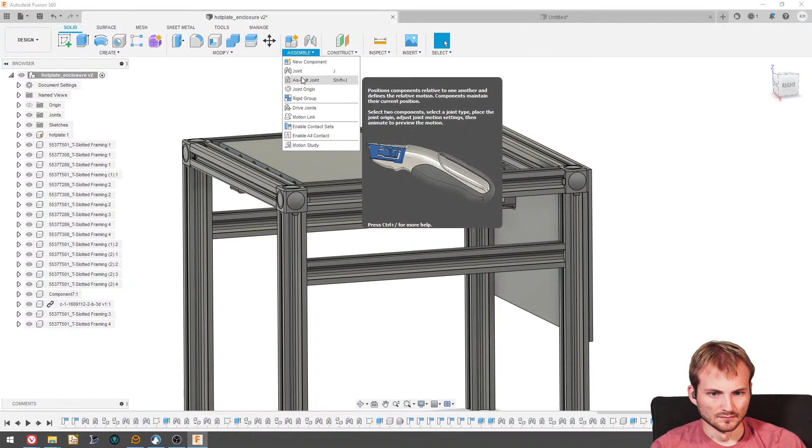Okay, so now this side will have an acrylic sheet. This side will have an acrylic sheet. And now we will put an acrylic sheet here. It's like, this is the stuff that's annoying.

This one probably needs to be about a quarter inch.

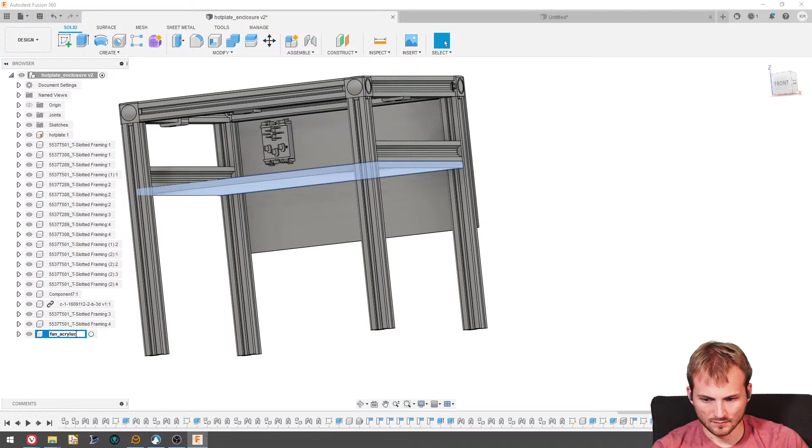So Bruce, this is what you're talking about, right? So now this side has an acrylic sheet, this side has an acrylic sheet, this side has an acrylic sheet. So now we mount the fans in this, which are pointing...

Does it matter which way they blow? I don't think it really matters which way it blows, because it's either going to suck in air from up here, which is cool, or suck air from the bottom, which is cool. Either way, is that what you were thinking of? It doesn't matter which way it blows for now, because it makes basically like a little air chamber, constantly blowing or sucking air through. In PC cases, sucking out of the case is worse than blowing into the case.

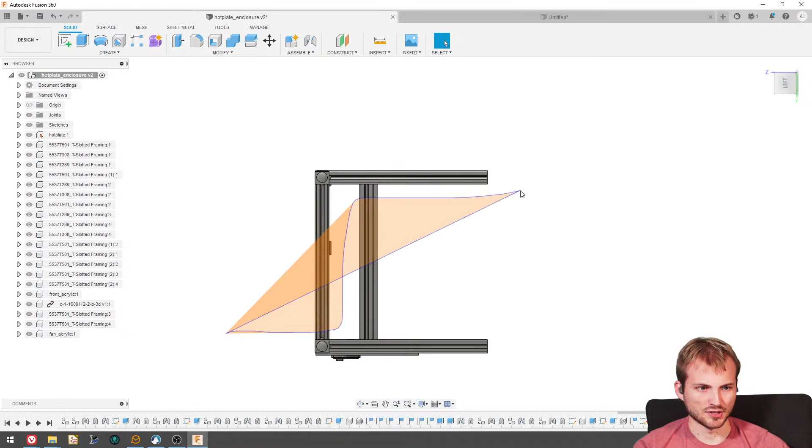Okay, so either way, that's something I'd pull across. Fans on one side and a grill. Remember, I'm not really going to have a grill because this is going to be the exhaust or intake area. So the fans would be right here, pushing air like this, across the entire length. So it'll either suck in this way and push it, or suck in here and push it out. Cool thing is we can always flip them easily to try different orientations.

But yeah, I really like that idea, that was good. Oh, and since this isn't flush, it's also going to pull air from the sides, which is helpful. Sucking air at 100 degrees. Oh, good point. Yep, yep, good point. So we're going to have to push air.

So if the fans are sitting here, where's my transistors, right? It's going to have to suck in air like this and then exhaust it, because that air is going to be super hot and that'll burn up the fans.

So let's go to DK again.

Oh, I guess we could get - they're not as efficient, but it would save us having to do a regulator to give us 12 volt DC. We could do an AC fan, because then we're using all the high power side on the AC end. That probably makes sense. So then what kind of width are we looking at?

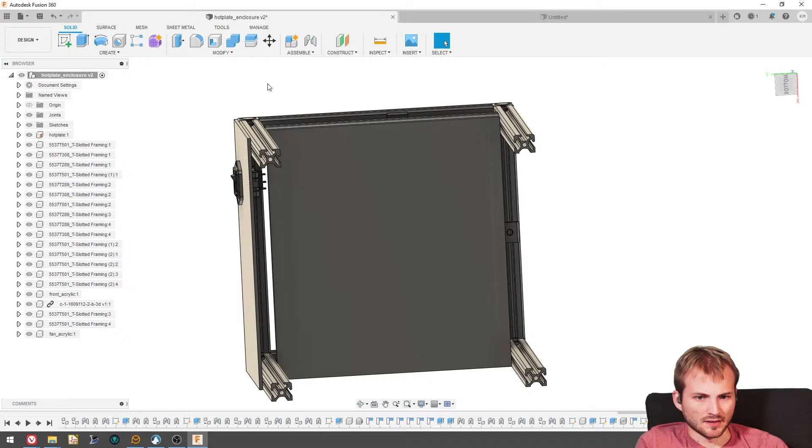Oh, I can just - because it'll probably want to be about this size. Oh, that's small, 2 inches. Yeah, but it doesn't matter if it takes up a good portion here.

So yeah, maybe I do my sketch. So if it takes up here, that's like 3 inches, so 75 millimeters. So let's look for 75 millimeter fans.

Going to grab some dinner with the girlfriend. Awesome stream, we'll finish it later. See ya, Brad, I didn't even know you were still here. Have a good time, it's a late dinner.

And then voltage, let's do anything in that range. What did I say for the fan? Like 75 millimeters.

Oh wow, AC fans, they're all big. Oh boy. Well, that might make it a little harder to do this. 120 millimeters is common, okay, it is still common. I didn't know if it was just for DC.

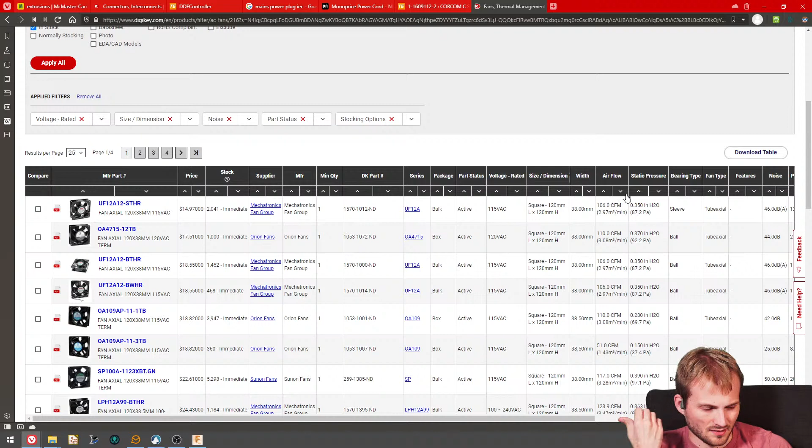So if we do anything from here - and we don't care about speed control either, because this is going to try to cool it down as fast as possible. So yeah, I think AC probably makes a lot of sense. Now we can filter by maybe higher CFMs without being super expensive.

115 versus what? 138. So that's a pretty good price here.

Does this have a step file? Sunon fans, I've never heard of them. So hopefully.

120 by 120 by 38. 120 by 120 by thickness anywhere - 38, yes. So even if this isn't the exact one, it's close enough.

Oh, do I have an account? Apparently. Millimeters.

140 millimeter fans push a lot more air than 120. Check that if AC has them. Sure, and we can check CFM.

It's funny, the YouTube channel is obviously more geared around videos, and I don't get a ton of people on the live streams. The couple live streams I've done that aren't specifically electronics design, not many people watch them. The majority of the audience is so tuned into the electronics side that when I do anything different, it's like nope, not gonna watch it, which is funny. But I've realized recently the video side is where the audience is. The live streams are just when it makes sense, so I'm not making them a super big priority anymore. I just do them because I enjoy it, and it keeps me from procrastinating on things like this.

Oh, that's big. I didn't realize it was that big. Yeah, heat, I don't think your 140 millimeter would have worked, too hot. I don't know if this is gonna work. Oh my gosh, yeah, I was way off on scale here. I guess it's a small little hot plate setup, but that's so much bigger than I thought it was gonna be. I thought we'd be able to fit two of these in here, but we're barely gonna be able to fit one. But I guess that's fine. Yeah, sense of scale, right? That's really funny.

Probably that will make the fan very, very unhappy, so I'm assuming we'll have to move it down here.

I've posted some more photos over in the Discord of someone's approach. Oh, sweet, I'll check that out. Oh my gosh, that is sketchy.

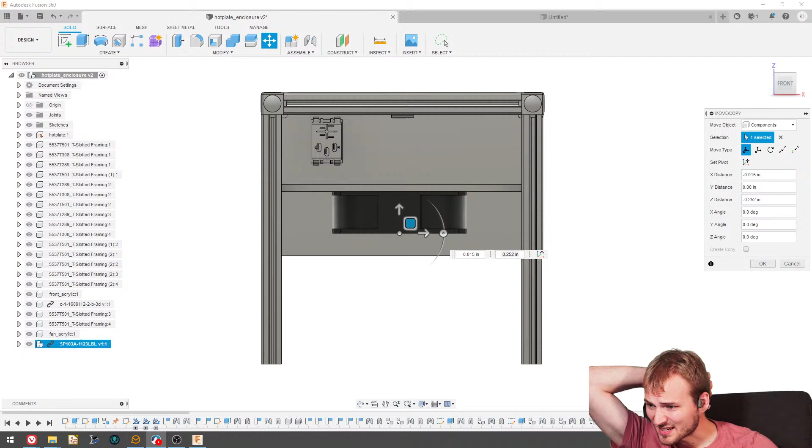So, oh, it's cartridge heaters. So why are there two different plates though? Still, I don't like the approach with the heat sink, because you're just losing all your heat from here to there when you're trying to heat it. It makes it nice for cooling, but that's about it.

Holy cow, got a dang wind turbine. That's really funny, he drilled it all. So he drilled half through it.

I still don't know why he used stacked pieces. That seems weird, 500 watts of heater. Yeah, that thing heats up real nice. And that's something I've thought of, doing a little bit more, but it heats up pretty close to a full profile with mine. And any more, I'd have to have a separate breaker for it.

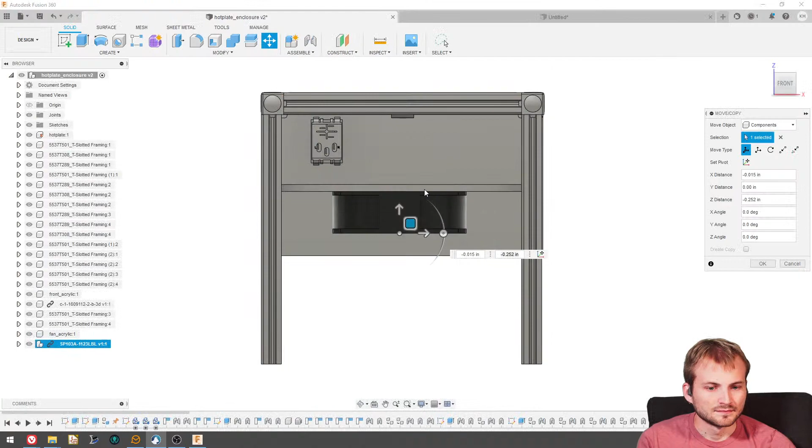Okay. God, I just cannot believe how big that fan is. You do lose all sense of scale. Let me just make sure that is 120 millimeters. I'm assuming it is. Oh, it's technically 104, so maybe they use a standardized size. But either way, it's fine.

Hi from Greece, I found your channel 3 days ago. I really like it. I'm currently doing my thesis and trying to master PCB design.

Well, if you manage to master PCB design for your thesis, you might be giving me lessons. I'm just kidding, that's cool though. I'm glad you found the channel.

Okay, so this will then suck in air here, or I guess from the whole bottom, we'll stop the acrylic panel a little bit. It'll suck in air, blow it through an opening here, and then exhaust the air all around here and at this exit, which will essentially increase the pressure. So this should be pretty solid, especially if those channels are there.

Not exactly master, but I couldn't find the right word. Yes, I hear you, I'm just joking with you.

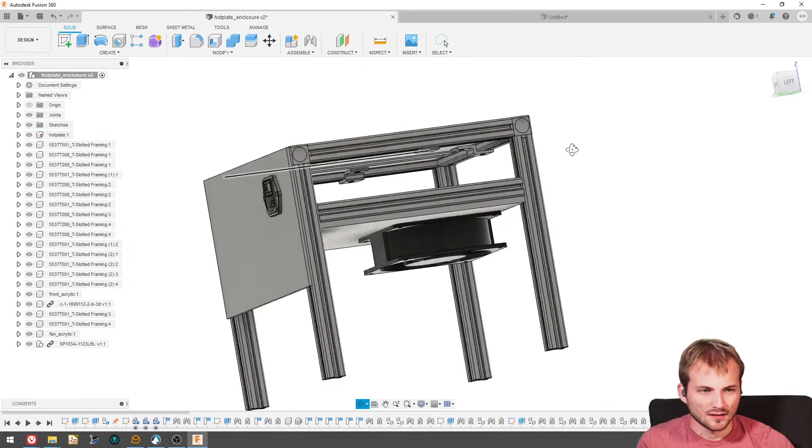Okay, so that is that. So then now this makes it super easy to add. Oh, so we'll move this down, because obviously we don't want this in the hot area.

So we'll move this down, and I guess Bruce, right? We should move this too. There's no sense in having this cavity bigger than it needs to be. I guess the only disadvantage is I'll measure how hot it gets to make sure it doesn't melt anything, but I don't think it will.

We should have this up higher, move this below that panel, and then we'll mount the PCB to the bottom of this acrylic. So let me do this. We'll mount the PCB right in here. So power comes in, it'll go straight into the PCB.

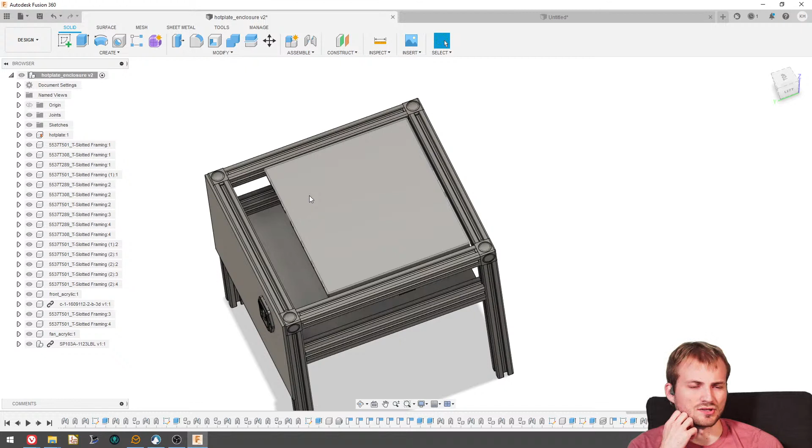It'll shoot up to the 6 heaters, and I haven't figured out how those are going to be set up. I'm thinking 6 solid state relays seems obnoxious, so maybe do like 2 paralleled in each. So do like 3 solid state relays with 6 connectors, just to save cost and annoyance.

So power comes in, goes to the PCB, 3 solid state relays jump up to here, power goes to the fan, and then wires across here to the front panel. The front panel has some sort of digit display and a few buttons.

Mount lower, yeah, make a tunnel. So, like, sometimes if a part does move, I can have my hand, like, right here trying to place with tweezers here, and it's never like super hot.

So I don't think the conduction or radiation from this is really high. I'm thinking that all of these are gonna be fine. I really don't think it's gonna get that hot. It's only anything that's in direct contact is going to heat up, but I guess we'll see.